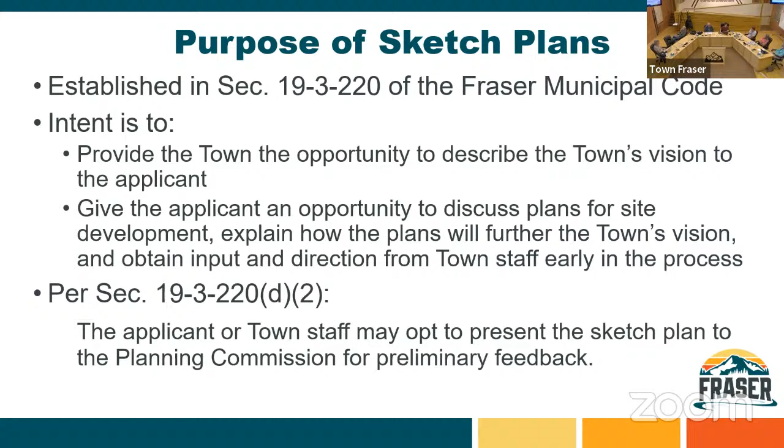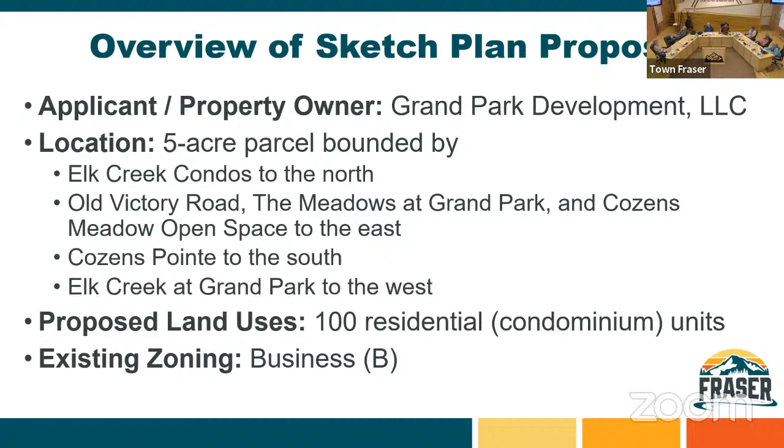So with that, I will dive into what is being proposed in this sketch plan. The applicant and property owner is Grand Park Development LLC. This is the 5-acre parcel that is bounded by Elk Creek Condos to the north, Old Victory Road, the Meadows at Grand Park, and Cozens Meadow open space to the east, Cozens Pointe to the south, and Elk Creek at Grand Park to the west. What's proposed on this sketch plan is 100 residential condo units. This parcel is in the business zone in the town of Fraser.

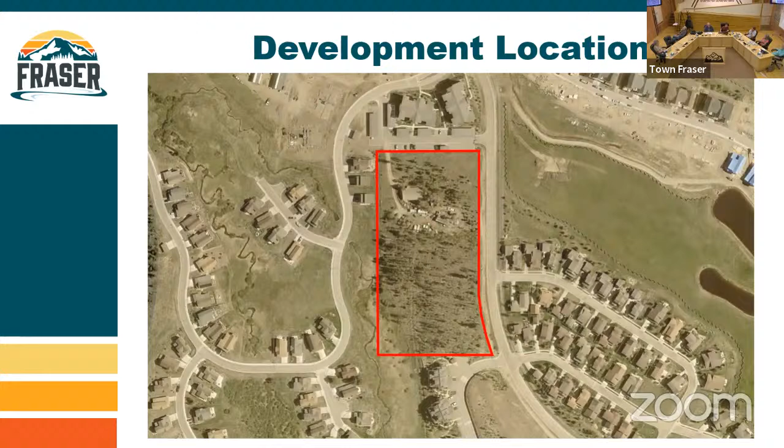So even though it's remained largely undeveloped, I know there's an existing home and barn structure on the property, but certainly not developed to its highest potential given the zone. And it's been that way for quite a while, but it's been zoned business for at least 14 years, if not longer.

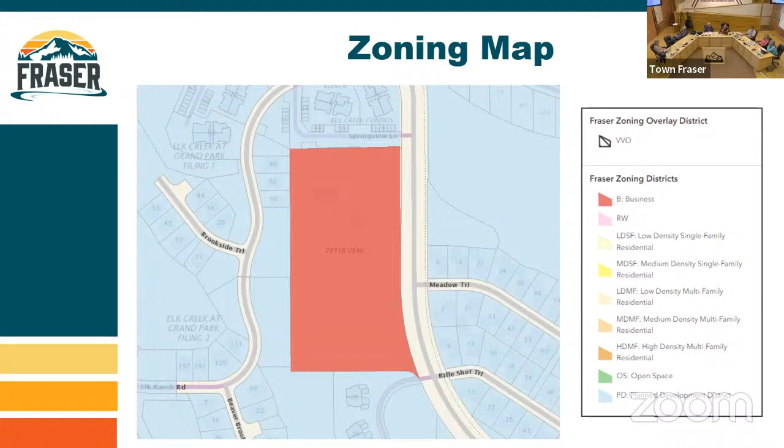Say that again, sorry. I think it's longer. There was a business in there for a number of years. Gotcha, thank you.

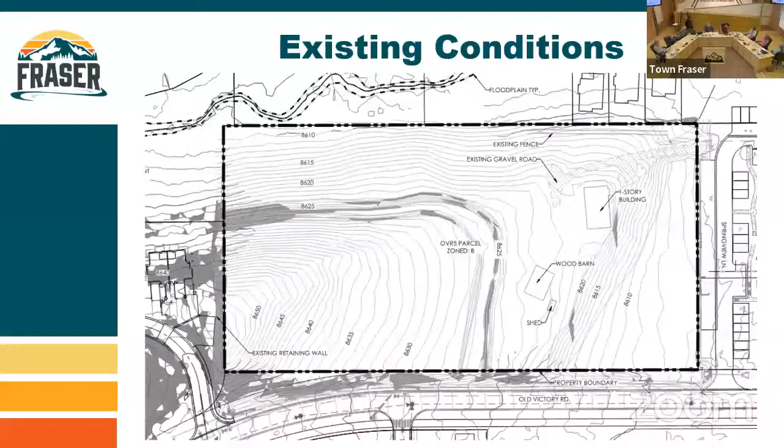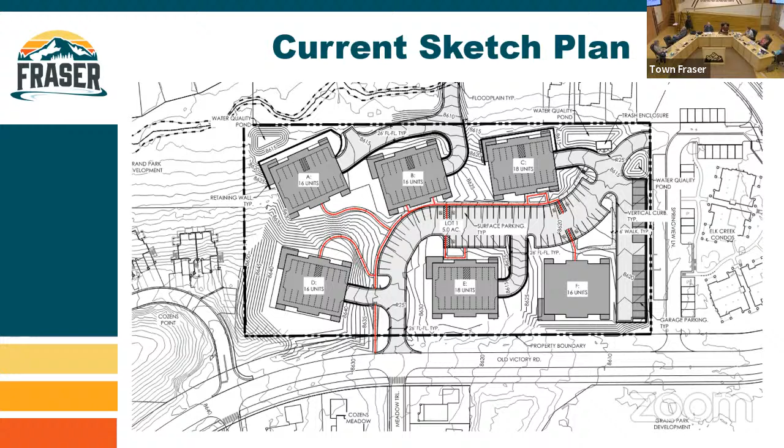Okay, so now I just want to talk through some of the comments that staff provided on this sketch plan application. The first has to do with how height is being measured on this sketch plan. So on the sketch plan that's submitted, height is being measured from the finished grade of the building.

So why does our code say this? I would argue that the intent is that, just imagine you have a site and you put, let's say, 5 feet of fill, and then you put the building on top of that. This is essentially saying that that 5 feet of fill you add to the site, you have to account for when you measure the height, because any building sitting on top of that is now 5 feet higher than whatever the existing ground was. And therefore, the impacts to views and creating shadows and things like that are effectively the height of that building plus that 5 feet of fill. So that's kind of the logic behind this.

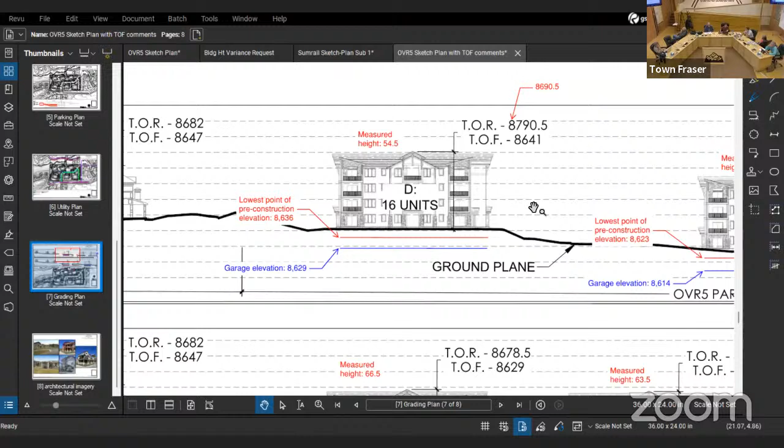This might be a better way to communicate it. This is from sheet 7 of the sketch plan, a profile or side view of these buildings. The thick black line is the proposed grade of the site. This red line is where the lowest existing point of the ground is, where this building lies. So current conditions is what's shown in red, and proposed grade is the thick black line, with the building sitting on top of that.

So that's where it adds that 5 feet or something. Exactly - on the sketch plan, it's showing a height of 49.5 from proposed grade to top of roof. But really what the measured height should be is from the lowest point of pre-construction elevation, which in this case is just 5 feet below building D.

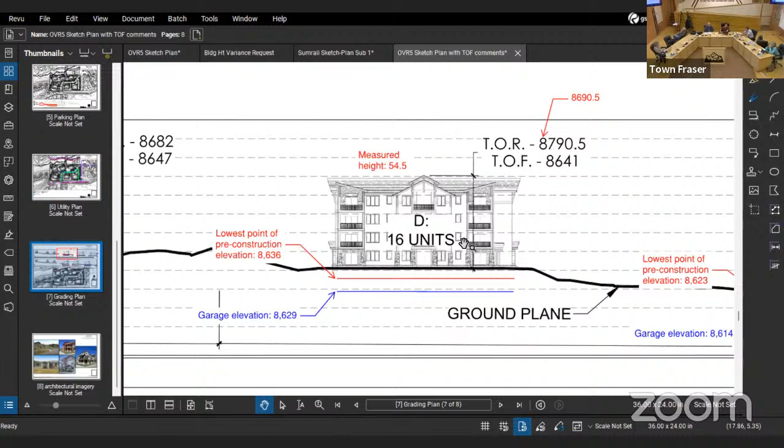There are some more significant differences in the case of building A, for example. The lowest point of pre-construction elevation is a good 17 feet below the proposed finish grade - that's the difference between this red line and that thick black line.

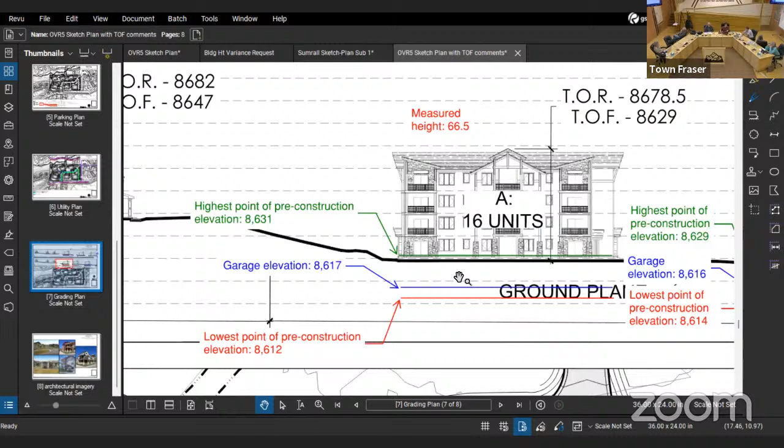So that's all gonna be fill? I think, well, yes and no. The caveat is that 5 of these 6 buildings were proposed to have underground parking. In the case of building A, this blue line shows what the bottom of that garage parking area would be - generally 12 feet below the finished grade of the first floor, shown by the blue line here.

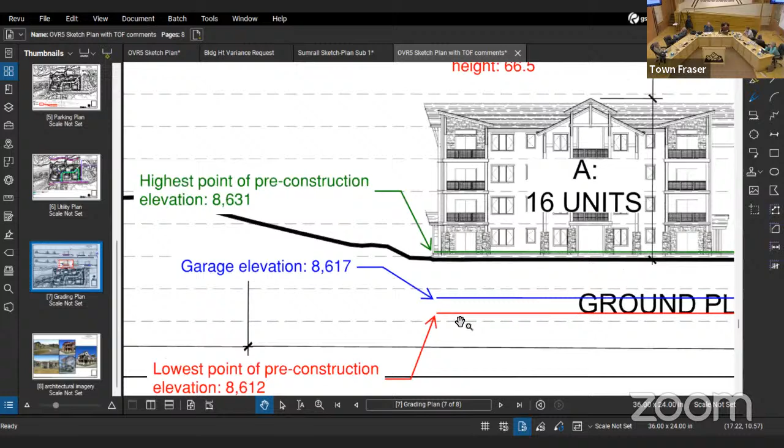Isn't there a lot of wetlands over there? Garages and wetlands - it's higher than that. Yeah, but I would generally say wetlands aren't shown anywhere on this sketch plan. That's not a requirement. I would imagine any wetlands that do exist are likely in closer proximity to Elk Creek.

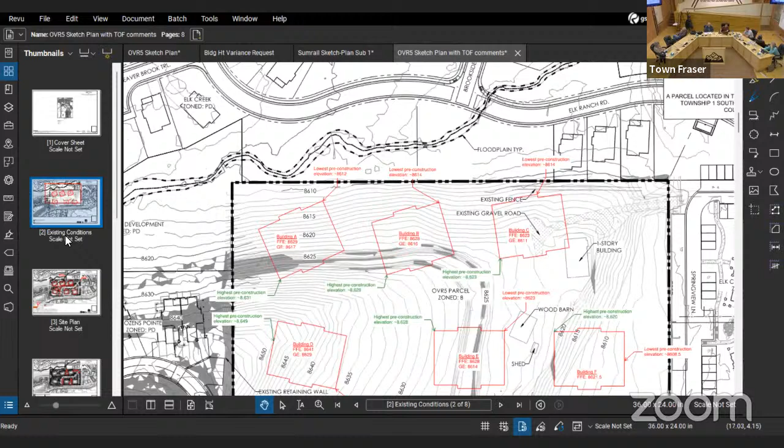It may be that there are some on the site, but it's not really determined at this time. You're crossing a floodplain to get into that site. That is true, but if you go out on the side, it's a huge slope coming down. Where the buildings are situated, I'm sure there's no wetlands up that high, but down near Elk Creek you would possibly find some.

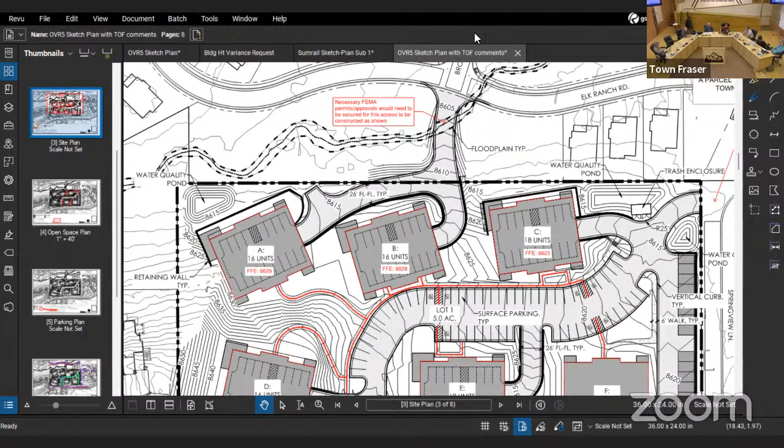Crossing that road, crossing the creek is gonna have to be engineered and looked at, and Corps of Engineers is probably gonna have to weigh in on it. Right, and that was the intent of this comment - simply to state that if this access road were built as constructed, it crosses an identified FEMA 100-year floodplain. It's highly likely there are wetlands in this area, so certainly some FEMA and Army Corps approval or coordination will be needed.

I'll just get back to the presentation here. As you're moving back to your presentation.

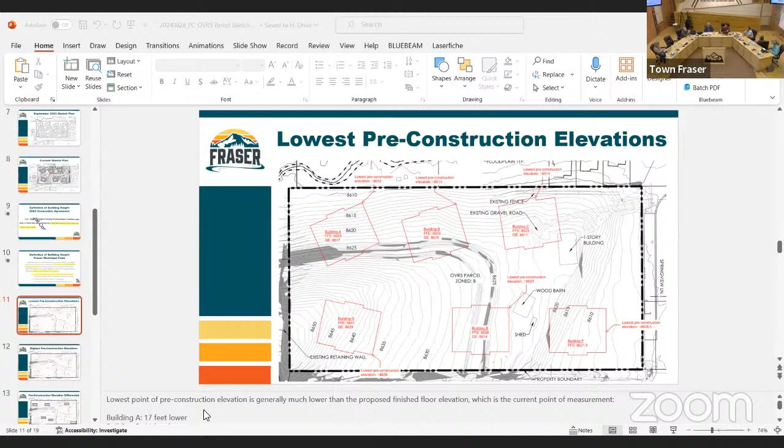Would you go over once more when you can use the average of the 4 corners versus when you must use the lowest pre-construction elevation? Because that's a little confusing to me.

Sure. Any property governed by the 2003 annexation agreement, so anything in Rendezvous or Grand Park, can use the average finish grade. That's a specific definition of height in the annexation agreement - it's the annexation agreement, it's not the code. Average four corners, it's not average - there's a big difference. Well, it says the average finish grade of the primary four corners, so yes, I could be more specific there. Right, okay, that's the average on that side of the mountains that homes are on and West Mountain - no different than this.

Okay, yeah, it's basically to deal with the contours and the slopes. Right, yeah, so that's a good clarification.

When you have a split level building that has two or more finished grades, because it's kind of a split level type of structure or a walkout basement type of situation, then it's the average finished grade. So maybe one part of the structure could be 40 feet high and the other 30 or something like that, but it averages out to 35. Does that kind of make sense?

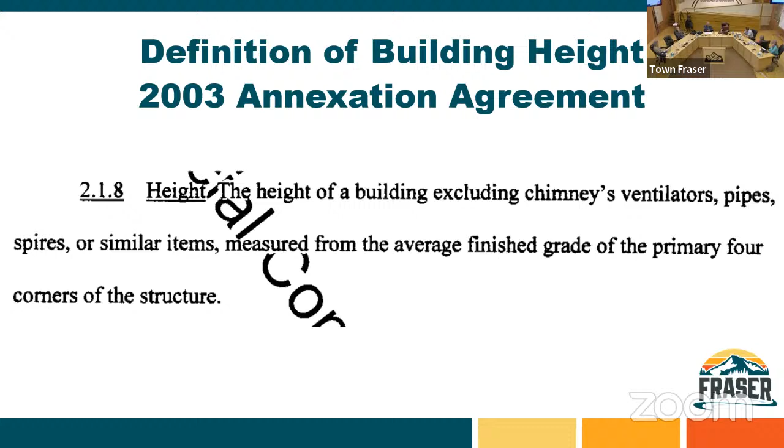How do you take into consideration a garage underneath the building? Because the way it's stated is that you're talking about building on a site with the finished floor elevation being the ground level. In this case, the finished floor elevation of where the first housing units or condos are going to be is 12 feet higher than the garage floor level. So how do you take into account that in terms of this definition?

According to the code, it's the pre-existing condition, so I guess the underground parking should not necessarily be a factor in the measurement of the height. In this case, any portion of the underground garage, any of those walls or foundations, don't appear to be exposed per this sketch plan.

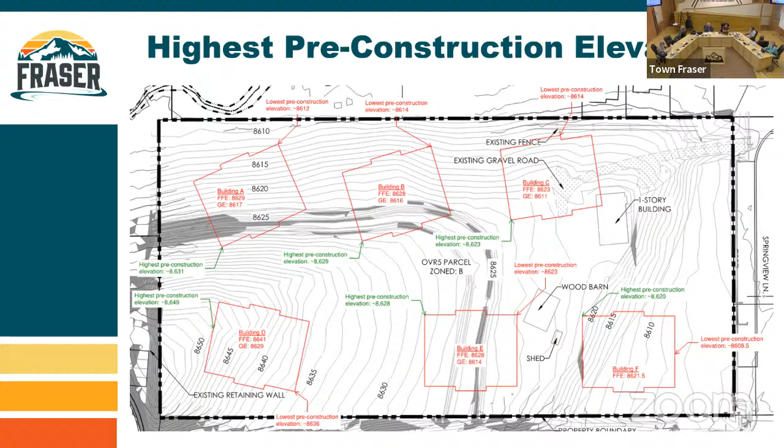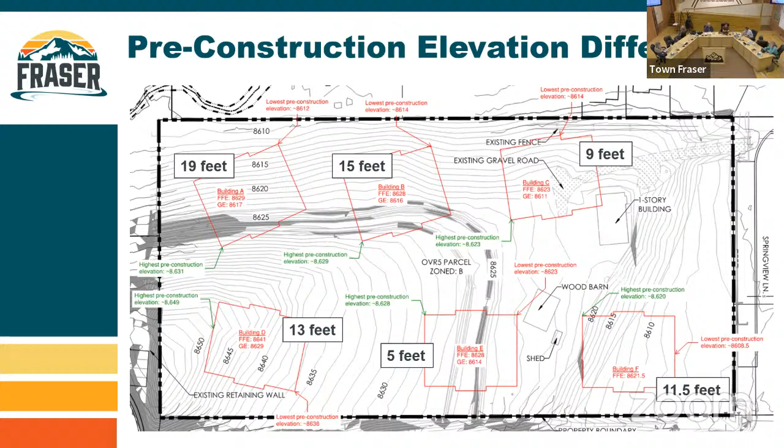So what that also means is that there's a big elevation differential across each of these building footprints, ranging from as much as 19 feet for building A to as little as 5 feet for building E. And then just to visualize this all in a side profile view, looking at building B as an example.

Again, the lowest point of pre-construction elevation here is 14 feet beneath the first floor elevation. So that means that the measured height, again to the top of the roof, not the midpoint, is 63.5, not 49.5.

The garage is located just above the existing low point, and the existing high point is roughly where the first floor of the condo building is located. Something that is also maybe helpful to visualize, and to the applicant's credit, the sketch plan really contains a lot of great information.

I think one other thing that would have been helpful is something like an existing grade line on these profile views. This dashed orange line here is certainly a rough approximation, but recognizing that this building footprint sits on the existing ground, it goes from that green line to that red line, the high point to the low point. Certainly the existing topography doesn't follow that dashed orange line exactly, but it's probably something close to that, some sort of slope down.

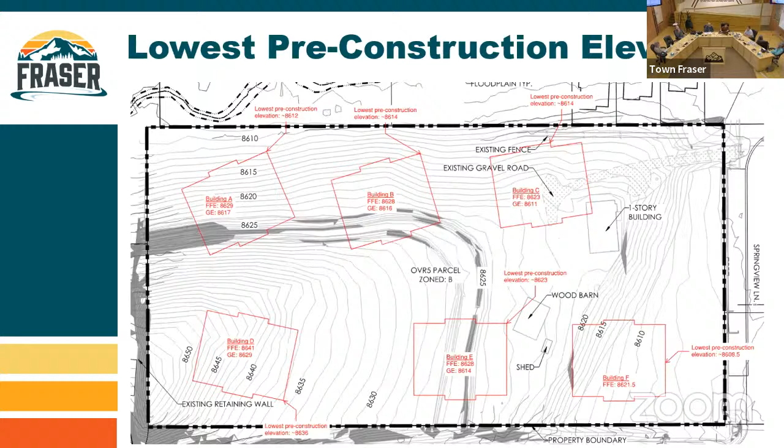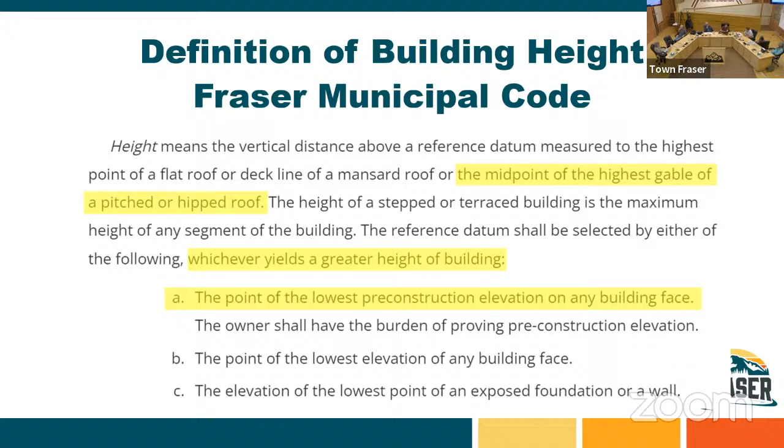One other thing I wanted to speak to is the administrative height variance that was also submitted with the sketch plan. Section 19-1-350 allows for town staff to act upon variance requests that do not exceed 10% of any minimum or maximum zoning standard. In this case, the variance request is for a maximum height of 49.5 feet, which is a 10% increase to the maximum height of 45 feet.

Our code further states that in reviewing and processing an administrative height variance, town staff must apply the same review criteria, these 7 items here, as would the Board of Adjustment. Even though it's not going before the Board of Adjustment, town staff has to evaluate against the same criteria. In my opinion, with the 55-foot height variance that was submitted for this site a year ago, it was denied, and I think correctly. But in evaluating these criteria with the current proposal, I think criteria 1, 2, and 3 are pretty clearly met for this site.

The topography of the site is a unique physical circumstance that is peculiar to this property. It doesn't exist throughout the neighborhood or district in which the property is located, and that topography was not created by the applicant. But again, to approve a variance, all of these criteria must be met. So the more challenging ones are certainly criteria 4 and 5.

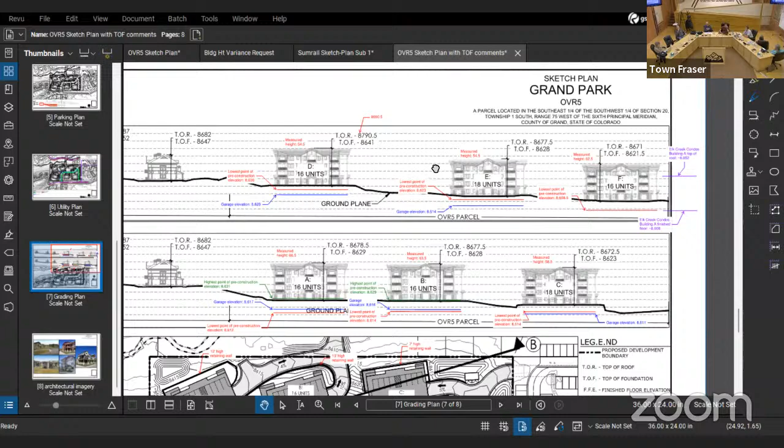No, you're good. So here's the sketch plan with my markup shown. What's shown on this profile view are the existing Cozens Point buildings, stair stepping down themselves - this is view A, going from south to north, it's these three buildings here. Following along to where the proposed buildings are, building D sits a bit higher than this one, building A is a little bit lower, but generally speaking it's stair stepping down. You can see D to E it goes down, E to F it goes down.

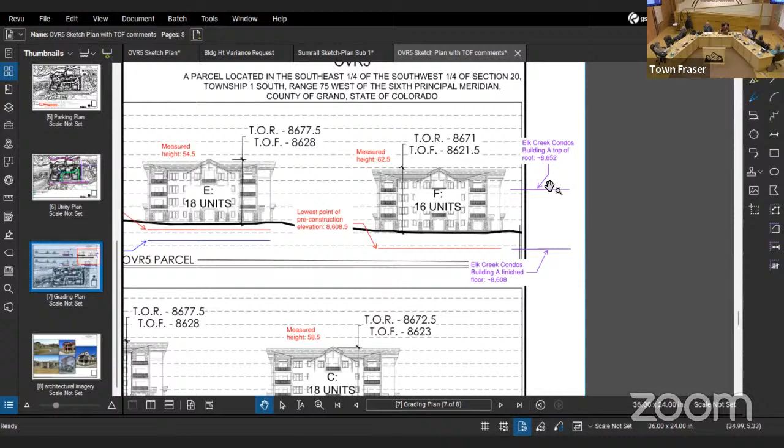The intent in speaking to Elk Creek condos is that the step down between, say, building F and Elk Creek condos building A, which is right here, is a bit more significant. And there's a fairly large retaining wall between them. So that's simply the point I'm trying to make here.

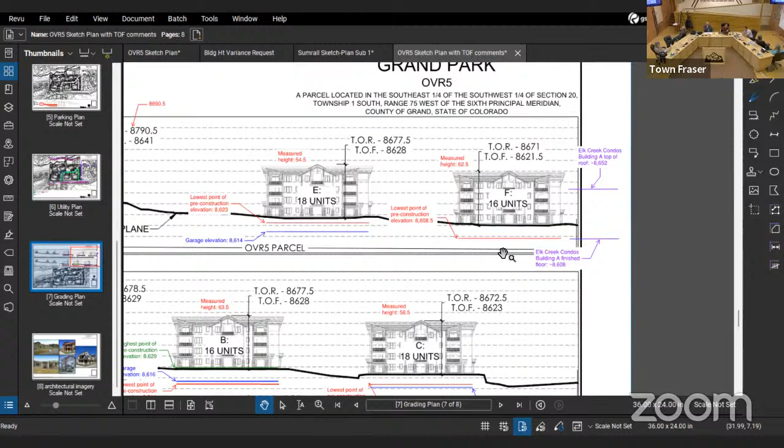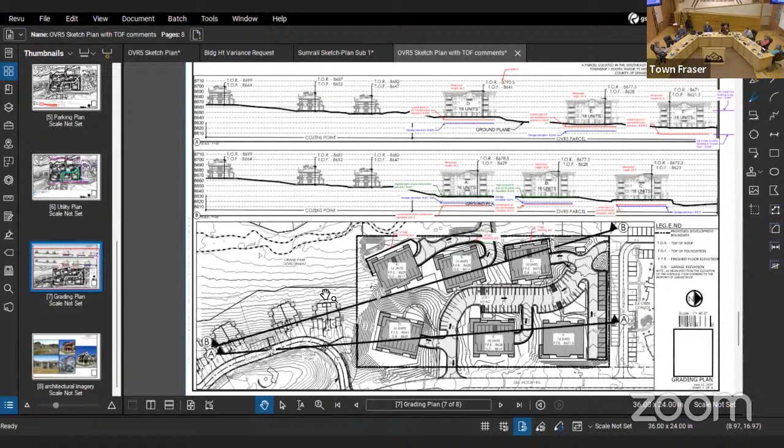Not reflected there is the view from the Elk Creek side, which is one more level of building on those particular Cozens Point condo units, because you actually have to walk downstairs to go into them. In other words, that's a view from the highway side, the meadow side, the Old Victory Road side. Does that make sense? Yes. In fact, those Cozens Point condo buildings aren't nearly as tall as these buildings from the Elk Ranch road side - they stair step those buildings down that slope. It was complicated.

Ask a question real quick - can you give an administrative variance if the height is actually proposed to be 65? I mean, do you have that capacity? Can't vary by more than 10%.

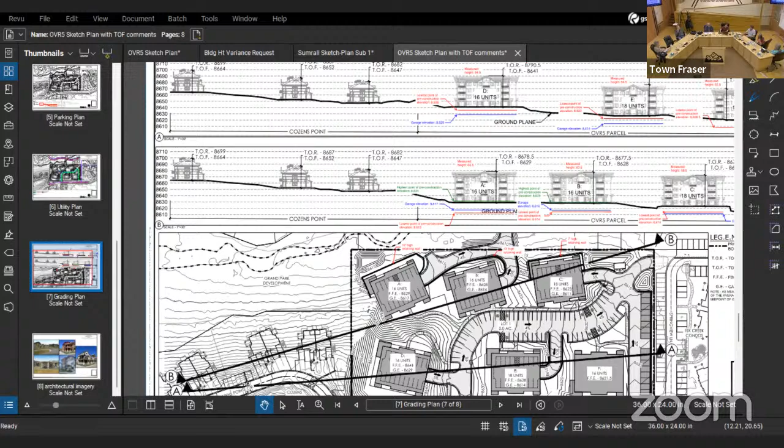I guess the question is, with this, does it not then need to go to the Board of Adjustment? Depends on how we deem the height of the building. Again, the height of these buildings as measured per our code is not 49.5 feet, so the variance request does not match the proposal. Technically, if this were to be approved, like in a site plan, then it would need to go to the Board of Adjustment for approval of these heights. That's probably the simplest way to say it. Yeah, so this is just discussion.

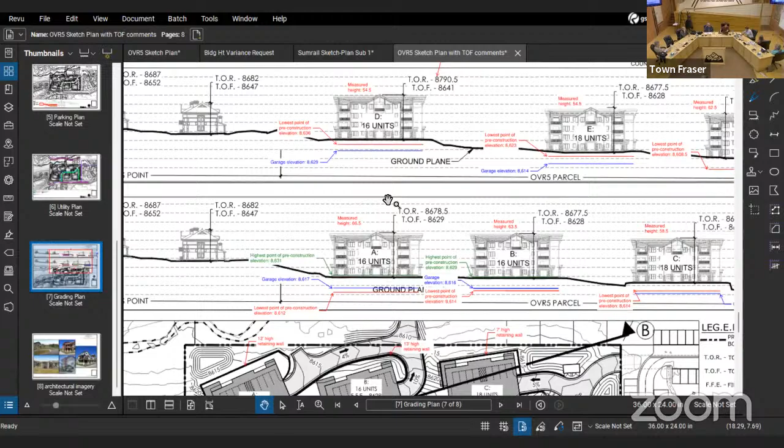Just to kind of show... I have a question, and I understand what the code says, and I understand how you measure different ways of determining what the height is, but...

Do we have any precedent for how a site like this gets graded? Because really what you're trying to do is balance cut and fill. You're cutting into the slope on the high side, filling on the low side. If you look at the graded site and measure as if the graded site were the original grade, he's probably within his limits to build height wise. But if you go by the existing grade before grading, for a residential home that wouldn't be much difference.

But for a building footprint the size of these buildings on the slope or terrain that we have there, it seems like this is an extraordinary condition, and some consideration should be given to how it gets graded and what it's going to look like graded, not what it looks like in pre-existing condition.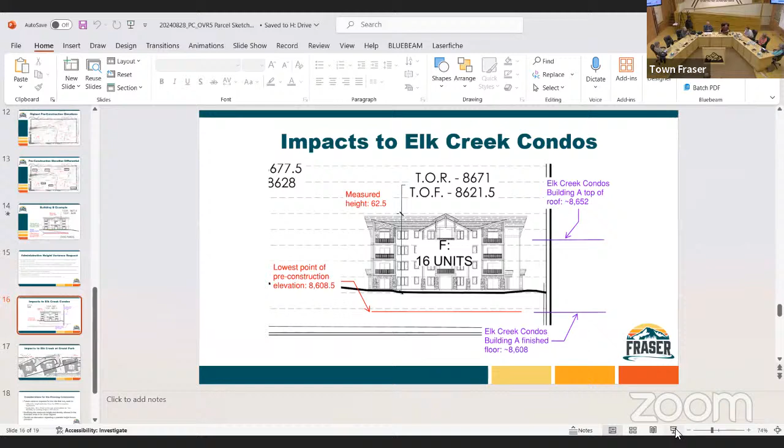I think just to close the loop on that, I understand the point you're making, Commissioner Ganusi, but again, speaking to the impact of adding that fill and then putting the building on top of that, you have to account for the entirety of that elevation in terms of impacts to adjacent properties and measuring the height. That's why I believe our code is written that way.

And I think certainly the proposed grading is to have as little export of fill out of the site as possible, because to grade it any lower to the existing grade, they would have to export fill offsite, which is expensive, and it just makes more sense to try to balance. And it's to enable underground parking, which is a good thing. Right, it's an amenity up here for sure.

It was also done with the intent, I believe, to create the stair-stepped view that you mentioned before. This is a tough site, but I do think Cozens Point is a good example of that building style, where the first floor is level with Cozens Circle, and then there's a walkout basement beneath it as the hillside slopes down.

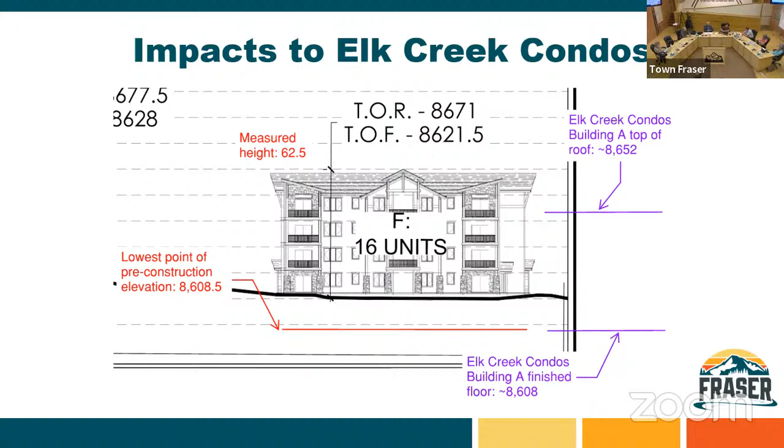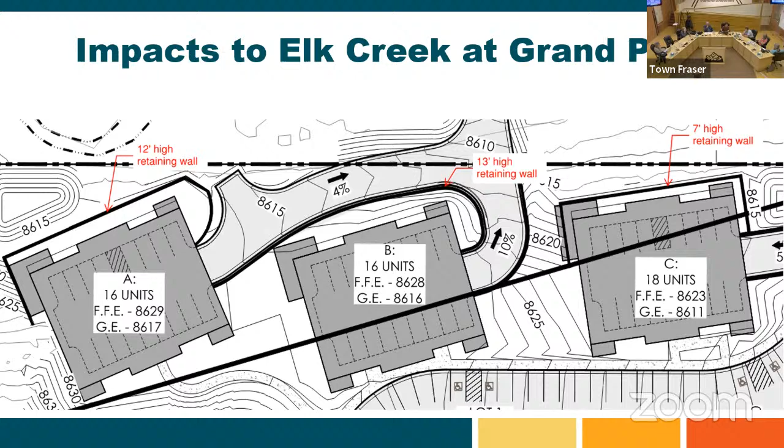Just one last thing on impacts to adjacent properties: these buildings facing towards the west, towards Elk Creek, all have fairly high retaining walls. So speaking to that impact, you have a 12-foot high retaining wall, and then a 49.5-foot finished floor to top of roof building on top of that. That's certainly different than if that retaining wall wasn't there and you had some sort of terraced building at 45 feet or 49.5 feet.

So a couple things for the Planning Commission to consider, and the intent of having this discussion: in conversation with the applicant, I think they are likely to revisit this sketch plan to some degree, but there could be some consideration for a future variance request. Either of these would have to go before the Board of Adjustment, which is why it's good to talk about them now, to gauge the level of feasibility or agreeableness to either of these types of variance requests.

So one type of request would be to utilize the definition of height from the annexation agreement as opposed to the definition of height in town code. The logic is that, yes, this is in a Town of Fraser zone, not in a PD district, but it's surrounded by properties that are—it's completely surrounded by Grand Park—so there could be some logic to using this definition of height. Another thing is there's a section of our code, which I'll copy on the next slide in full, that allows for flexibility of building heights in a PD district.

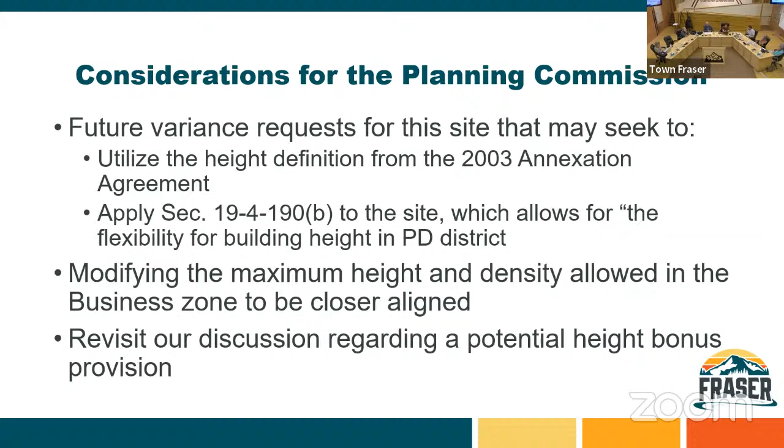So in closing, this is that section of the code I referenced that speaks to the flexibility of building heights in PD districts. Essentially, even though there's a maximum allowed height in every planning area, it says the final height of those buildings may be negotiated by the Planning Commission when an FPDP is submitted, and also subject to further negotiation and/or approval of the board. The negotiation should be carried out in relation to these 10 items.

For reference, this section was used to allow, on the northernmost of the 2 Market Street buildings, a 75-foot tall architectural tower right on the corner of Grand Park Drive and Highway 40. Typically our code would allow an appurtenance like an architectural tower or spire just 10 feet above the maximum allowed height, which for that area is 55 feet. But the Planning Commission allowed that tower to go up to 75 feet, basically citing this code.

I'm not aware right now of any other situations where this section of the code was utilized. The applicant likely knows and could point us in that direction, but this is one example I do know of. It was utilized for an appurtenance to the building, an unoccupied architectural feature meant to enhance the aesthetics and not provide any additional occupied floor space. So that's maybe slightly different than this example, where the ultimate goal is to achieve that 4-story height.

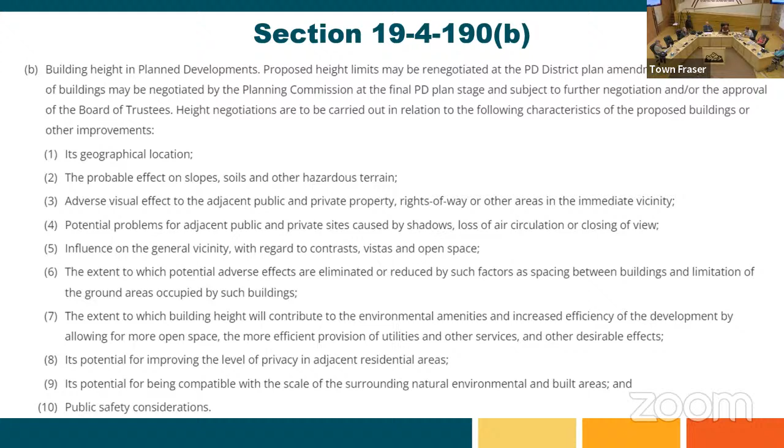All right, thank you. Any other questions for staff before we move to the applicant?

Okay, Clark? Yeah, hi, everyone.

So to start, we could have had this conversation 45 days ago, because that's when this staff review is due under your code. Not to get back into lawyers and time, but it matters, right? 45 days in this environment is the equivalent of 90 because of our short construction seasons in winter. And time's money, right?

So I think this is a discussion, so I want to have a discussion with you all. And I want to hear your input.

I'd first like to ask Andy this question: how do you square your position for protecting neighbors and the heights that were already designated on this property? By the way, in 2003 I think this was annexed to the town with the B zone district. But how do you square your position with Victoria Village? That height was changed to 55 feet, right next to a bunch of existing residences. So how do you square that position, Andy, with that? That just happened recently. That's pretty near term.

So, I mean, I think there's kind of precedent. Katie, you were involved in that, I remember your comments on that. So how do you square that? Well, there was a tremendous amount of credit given to that project because it's price controlled. I don't believe we see any price control here, so that's the bottom line.

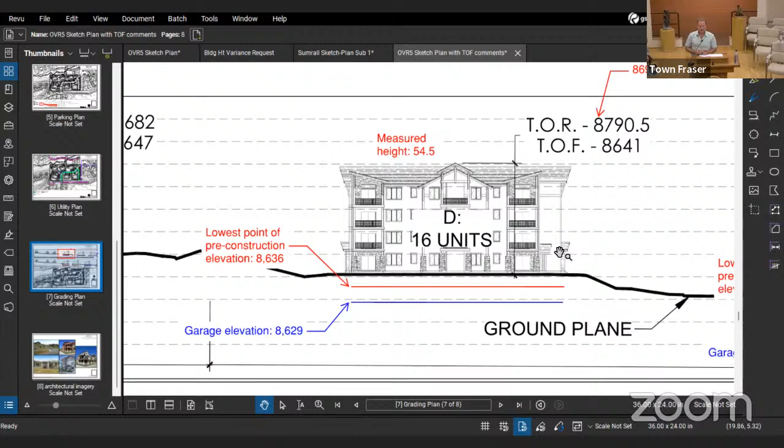And with that, we want to have a secondary access. This isn't a very long property, so we'd probably be close to cul-de-sac length, but I still think it's wise to have a road coming in off of Old Victory Road, like what we have, or off Elk Ranch. It could go either way. Old Victory's easier to cut in. Off of Meadow Trail, it's an easier road to bring in than the one off Elk Ranch Road.

On this, though, Elk Ranch is only the access for A and B building. I think it's A, B, and C, maybe... no, I'm sorry, it only feeds those two. So what do I get out? That's just the one, or we'll work that out eventually with the fire department.

But the idea on that one is those are quite short roads. And then you've got the road up above, which would also provide parking. Some of the surface parking relates to those. So I think the fire department would really like that, Katie, because there's access on both sides of the buildings, which you rarely get in this instance.

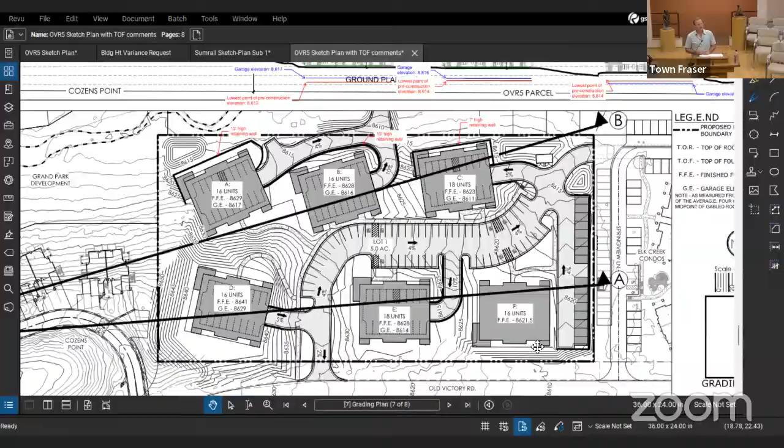But I think we have a similar format in the original plan. If we go back to the very original where we were taking the Elk Creek condo buildings up, we had one version with 7 buildings. It worked just fine and gets us up to our density.

I like the openness, and that's why I dropped it down to 6 and said, let's go taller to get the height. I think the core decision the planning commission needs to make is: if we're married to heights, then we're making design decisions that create wider buildings, bigger footprints. Because we actually have more open space on all our projects than required, and that's because we keep pretty compact footprints. So we can either go up or go out.

I prefer going up and having more space between buildings, but if you guys as a planning commission think, why not go out, we can design to that. I'm just looking for guidance at this point, and would like to make one last drawing of this and put our sets to go, rather than me keep throwing darts blindly here hoping one sticks. So that's where I'm at. I'm listening, I'm all ears.

You guys tell me. Just wondering, Clark, if making the building footprints wider versus going up, you're gonna meet with less resistance generally trying to get some sort of height variance.

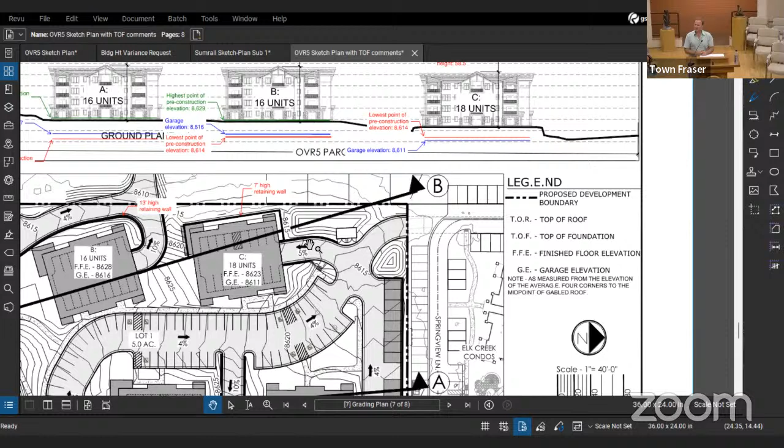Access to this part of your development now that you bought it? In that development, we preserved that access for Mr. Sumrall, so the access is still there. It's a recorded easement, and he has the right to be there, the town has a water line through it. It's a straight shot, but that's something we worked around for a number of years. We had some designs where we didn't use that for a few reasons, but I kind of like what it does for utility connections and looping, which is preferred by the town for water systems in particular. And I liked what it did for the accessibility of the property by providing multiple accesses. So I think it's important to keep it.

So, Mr. Lipscomb, I like this plan. I think that we get too caught up in height, and I think that your explanation of how you got the bigger footprint by having the drive aisle makes a lot of sense. I think people could understand that and would value having an underground garage versus surface parking. I do think it's important to work with the topography, so I'm not a big fan of scraping the site and terracing it so that it doesn't look natural. I think you've done a good job with that.

I think it's important that units have reasonable heights, and if you could get, what are the ceiling heights in these? Tens? I think that's great. I think that's really what the market wants. That's the market, yeah.

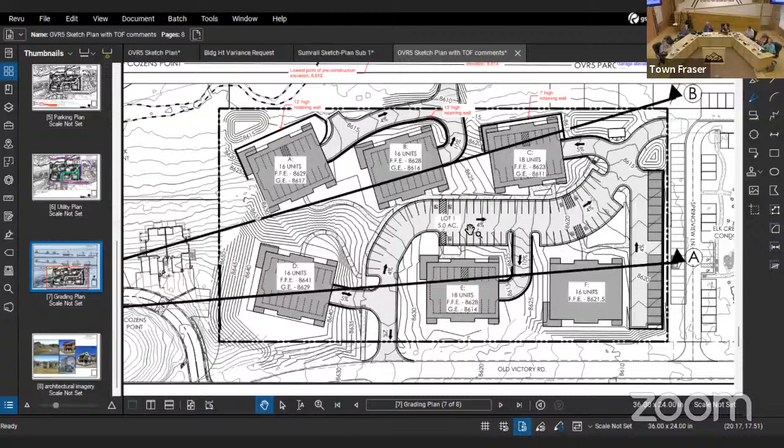Throwing in some deed restricted units would definitely validate this, like I said, with Torrey Village, we went higher because of the public good. As was your approval initially for the 2 buildings over at the Mill Apartments, the county gave you 45 feet versus 35 feet on those 2 buildings because of the public good.

No, that was the design issue. The county was, I was at the meeting. I was at that commissioners meeting. You were not at that commissioner meeting. I was. Anyway, that's not the issue.

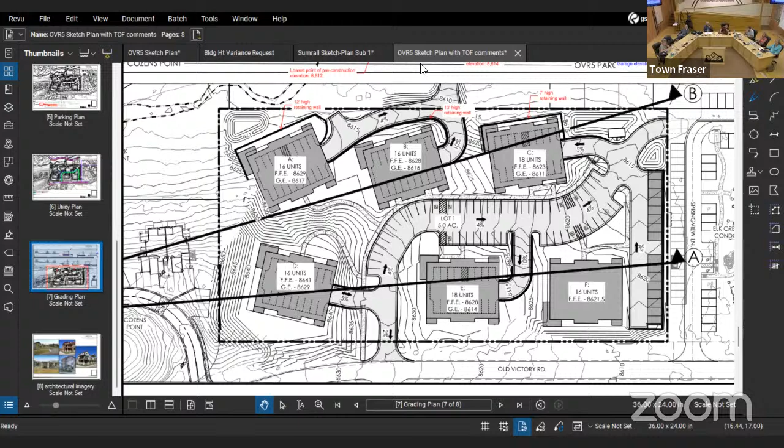It was the flat roof design, because I still ended up with 9-foot ceilings. And we already had the deed restricted building with the same units. It was design A or design B.

Design B was a better design. It wasn't commissioners, by the way, it was planning commission and board of adjustments. And you were not there. I was, so. But thank you though for the input.

But the housing and the deed restriction that we did do there had nothing whatsoever to do with the height variance. It was about getting a gabled sloped roof on those buildings in lieu of the flat roof design that was the original approved design.

I think another thing that would really help with getting the height variance would be to have some good visuals for the neighbors to see what effect it would have on them. So when the neighbors come to us or come to the town, we can say, this is what it's gonna look like from your front deck, patio, your living room window, what you're gonna see. I think that would really help.

Mr. Sumrall, despite us working around that eyesore for a long time, it was quite the eyesore. So just about anything is an improvement. I think the neighbors appreciate the cleanup, and I think most of them recognize my sensitivity to what we try to do here.

But I appreciate that, Annie. I think if that's the direction we settle on, the next step is to go do further architectural work and design a building exterior, do a 3D rendering and say, here's what it looked like. In that regard, the reference point I use are the trees that are still there.

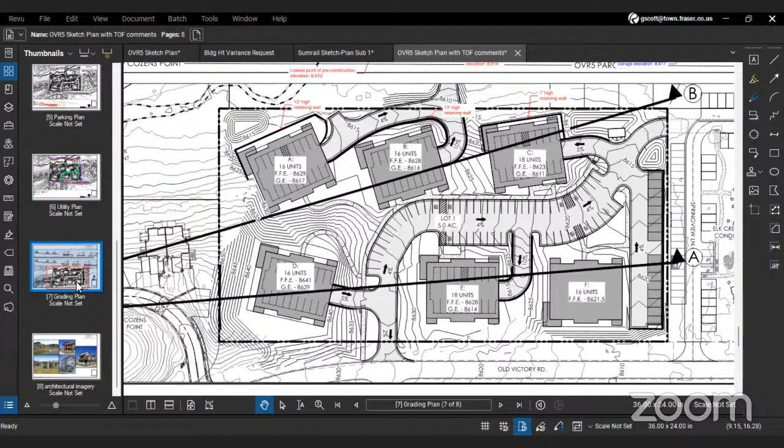So those are 2 suggestions I have that would improve the acceptance, at least by me, of the development. I also appreciate that you're developing it with homes instead of businesses. So that would be my input.

Thanks, Steve. Those are good comments, and I appreciate the pointed feedback.

I think if we do those condos, it would end up needing to do one more building, 7 buildings total, to make the economics work, because it's a very expensive site to develop. I'm not opposed to looking at that further.

Regarding Meadow Trail, it's typically good land planning practice to line up roads. I hear you, but personally, if I were pulling out of there onto Old Victory Road, I'd turn right and go on Old Victory Road. I think about the drainage right next to Bob's house and that concrete pan, and it significantly slows people down.

So I think that would be a deterrent once people lived in there. But I don't know, what does the planning commission think about roads lining up and roads not lining up? I think lining up roads is a good idea, but these pans and traffic calming measures that make it more attractive to take a more direct, better route for traffic is one way to deal with keeping the traffic down while still having the safety of this added access point.

I live right there by the pan, and I must hear 5 to 10 scrapes every day - fast, kaboom! They don't do it too often though. I think after the first few times they bottomed out, they would either turn right or left on Old Victory.

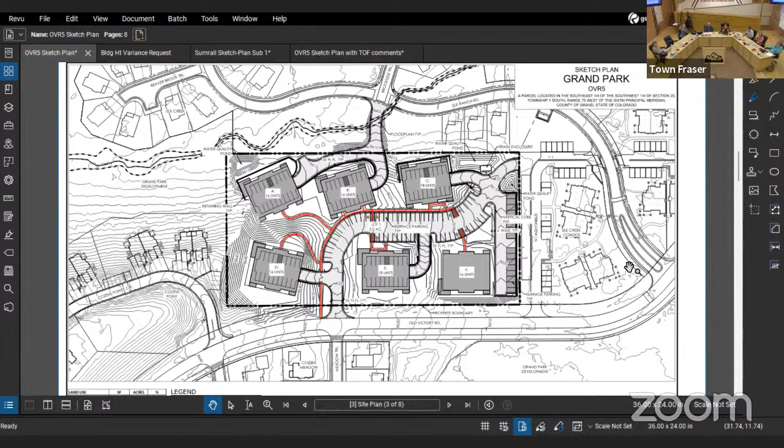How do you guys feel about 7 smaller buildings versus 6 larger buildings? Can we go back to the first plan that was with 7? That was with 4-story versions, which is exactly 49.5 feet to the midpoint of the roof with 10-foot floor plates.

That plan is 6, 4-story buildings. Maybe not all of them may be 4 stories, Bob, but I think they might be - regardless, that was a 4-story version of the Elk Creek condo. Oh okay, so those were gonna be 4 stories. Yeah, because the Elk Creek condo's got elevators.

And it has an elevator in each one of those buildings, so it makes sense. So where would the 7th building go, just ballpark? Boy, I don't know, I'd have to go sit down with our planners, and it certainly wouldn't go on Old Victory - it probably would go on the side towards your neighborhood, Bob. Because the other side is Elk Creek, where there's 4, and I don't see any space there, and the topography is pretty steep.

It probably could possibly go up at the top. We might be able to reconfigure something up towards the highest point of the property, and the one kind of right next to that road now. Maybe, I don't know, I'd need to sit down with my land planners and play around with some different concepts.

But if you did this concept with 7 buildings, those would be more stair-stepped and benched up the hill. It would look more benched and stair-stepped than the current 6-building plan we were looking at, and there'd be a lot more parking, obviously, since there's no parking under these buildings - it's all surface parking.

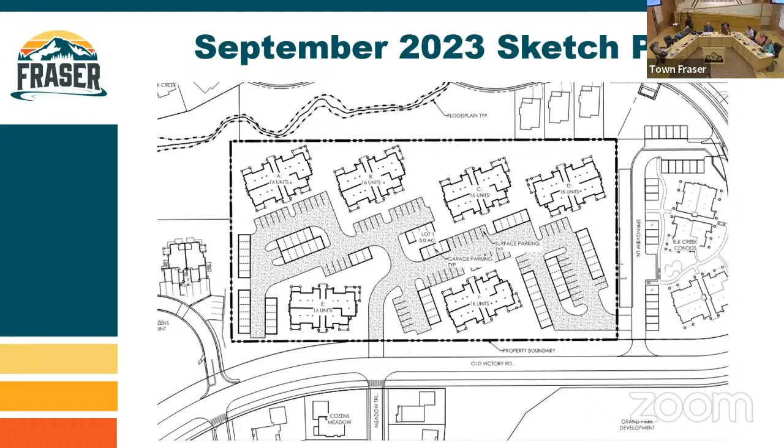And I'm not talking skyscrapers here. Having a 4-level residential building is pretty practical and reasonable. I think Winter Park Lodge 2 is 4 levels. Andy, do you know if that one's 4 levels? It kind of stair-steps, but I think it's 4 levels, because it's going up the big hill behind. So I could be wrong, but anyway.